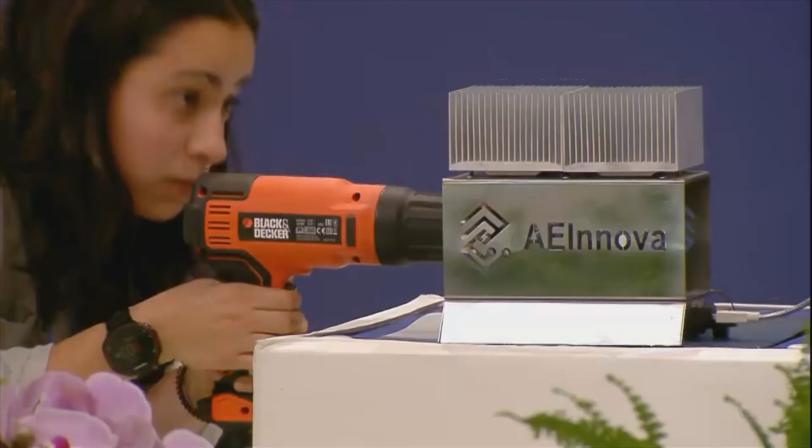Well, heat is energy. Let me show you a demonstration. So please, Teresa, let's show you how we convert the heat of a process. This is more or less a hair dryer, okay? And we will apply heat to this thermoelectric device. I will explain later the technology base of thermoelectricity, but just by applying a heat source to this solution, we can generate enough energy to move this fan, okay?

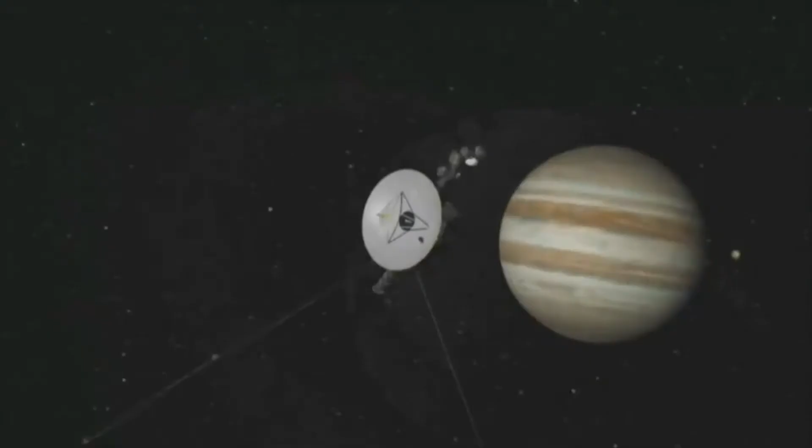Voyager spacecraft. NASA Jet Propulsion Laboratory, in 1977, planned to power a new era of deep space spacecraft. They tried to explore deep planets far beyond Mars in order to analyze what was happening at Saturn, Jupiter, and Neptune.

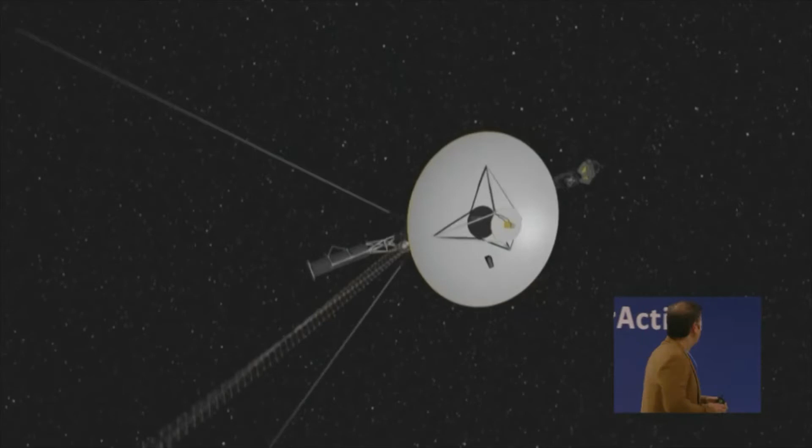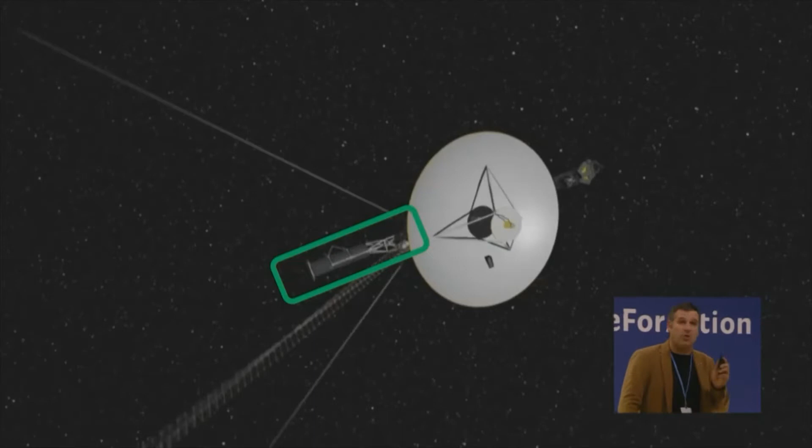So the only way to power a big spacecraft like Voyager was not using solar panels, because when you're far away from Mars, the sun is just a dot in the sky, so you cannot harvest any kind of energy from the sun. The only way is to use, in this case, a thermoelectric generator. This unit generates energy from a heat source. In this example, it was basically a plutonium heat source of 1000 degrees Celsius against the 0 Kelvin of the outer sky.

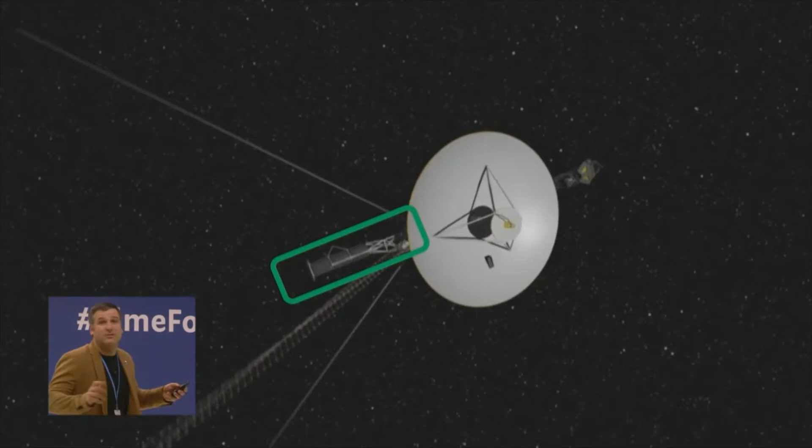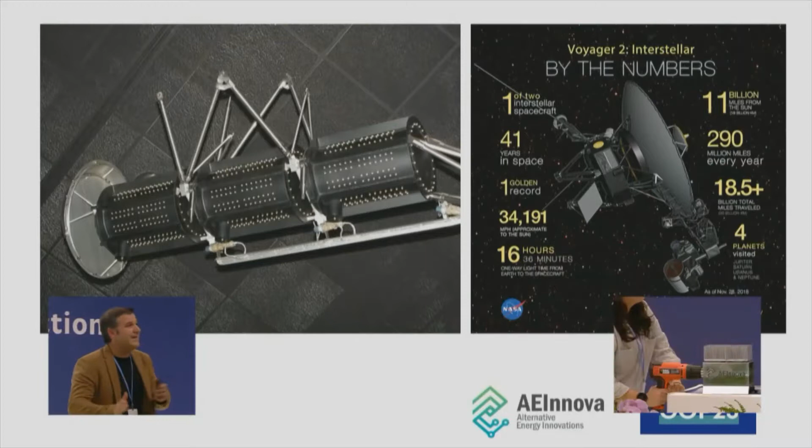Well, we are not using plutonium, absolutely. We are using the heat of an industry. But this equipment that you can see here, this is the thermoelectric generator. You will see later several similarities with our waste heat converter.

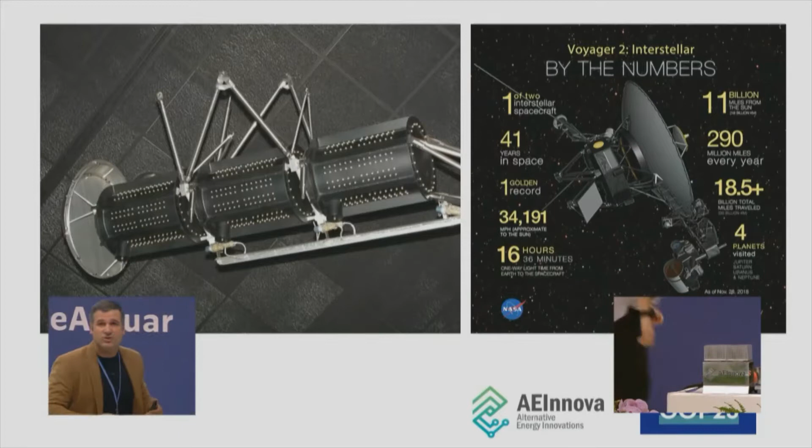From 1977 to now, there have been 63 deep space missions launched. The last one was sent by NASA, called New Horizons, giving us beautiful pictures of Pluto and the smallest planet of our solar system, the Ultima Thule. So, 63 space missions, and we said, why not use the same principle that works in the sky, but for the industry?

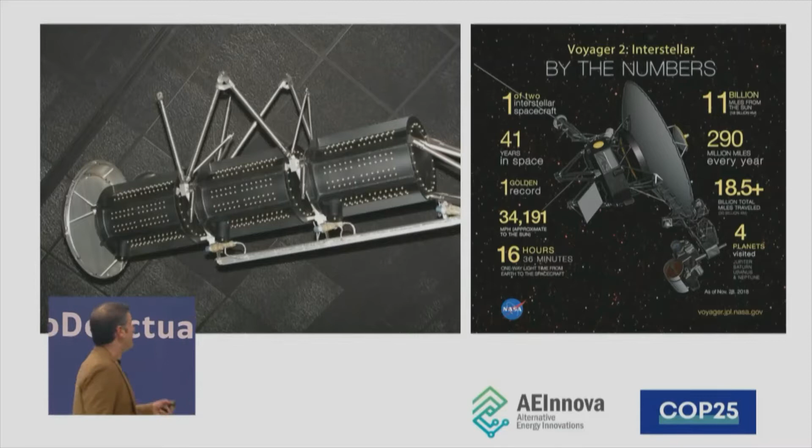But the question is, why haven't we heard before of these solutions here in the industry? Well, we can see here our planet, the Earth.

Later the deserts appeared, also not suitable for life. But then life as we know it nowadays appeared, and people took care of themselves, living in caves, dominating heat, making tools for surviving, inventing the wheel, for example, and being artists.

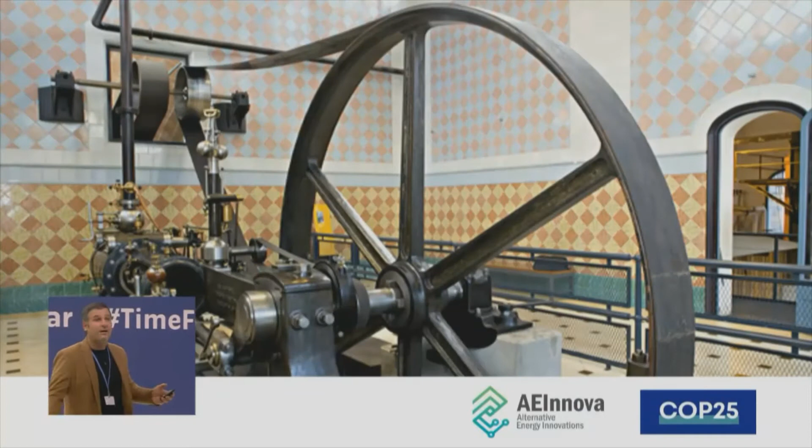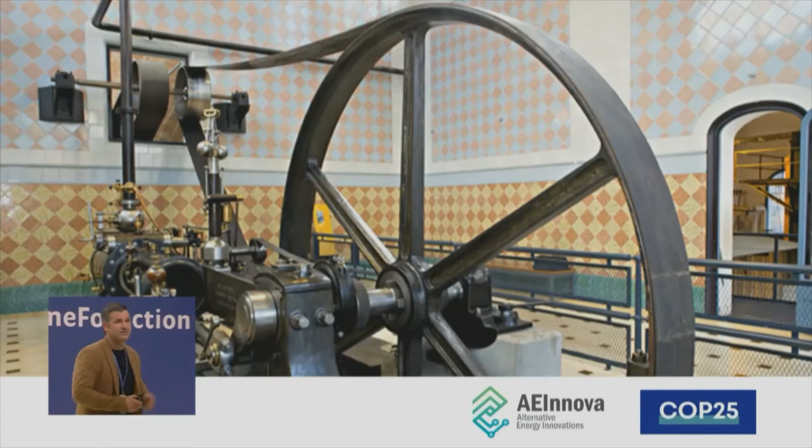Also, we began farming, and we began, how do you say that, David, stock breeding, okay? We organized ourselves, living in communities, until the Industrial Revolution appeared. This was more or less 150 years ago. So, more or less thousands of years living in the same conditions until industrialization appeared, giving humans the opportunity to enter the industry. We could manufacture anything - everything became possible to be created by our hands, thanks to steam.

Also appeared the massive production of cars. Anybody can take at his home a beautiful car to move. So it seems that everything was possible. We can be very creative in the way to consume goods and services, and the richness appears everywhere. So everything seems to be possible.

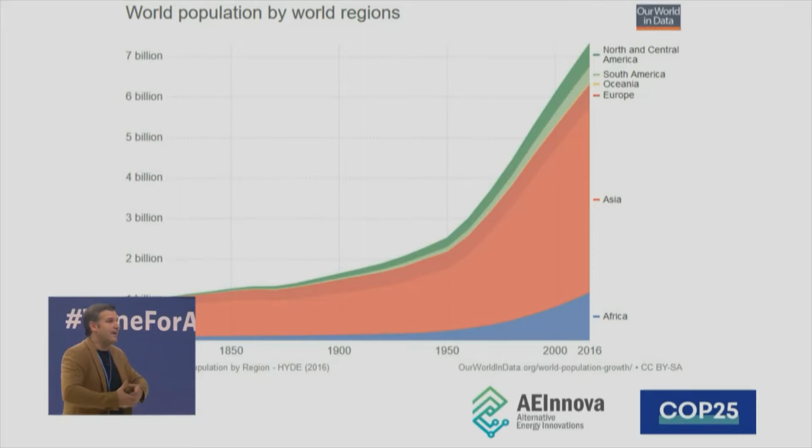But in the last 70 years, the global population has multiplied by 3. So there are not the same opportunities to access these goods and services for all the population. For example, if you pay attention to Asia or to Africa, the level of increase in population has been explosive in the last 30, 40 years.

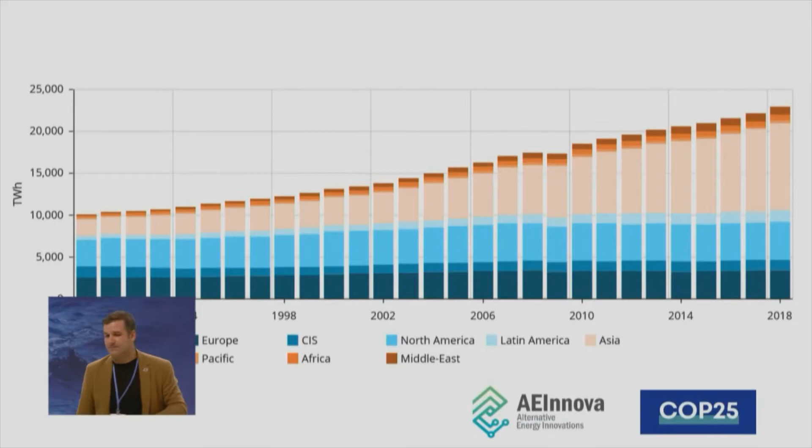So why haven't we heard before about this way to generate power? Well, this is what is happening now. To manufacture all the things you buy every day on Amazon, somebody has to produce them. We need a big amount of energy to create everything, to transform raw materials into final processed products. If you pay attention to the global energy needs worldwide, there is a big increase in energy demand just to give solution to this high demand for products from this new population that is appearing.

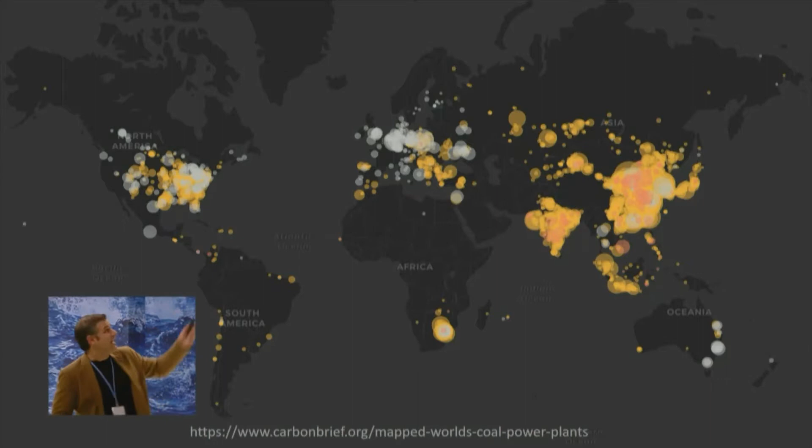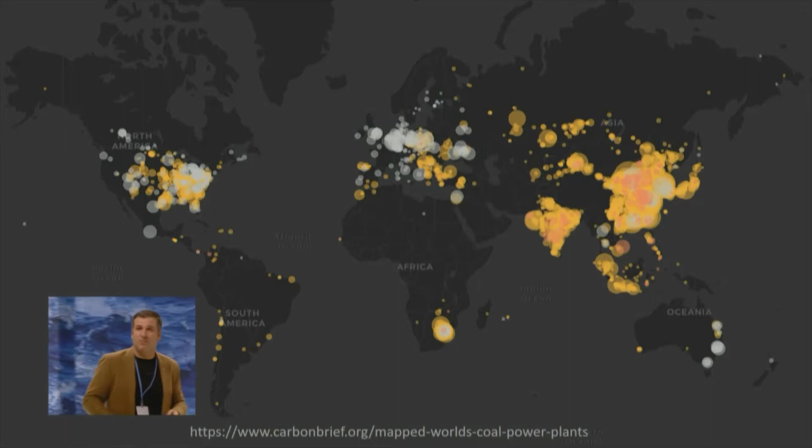In this map, you can see all the coal power plants that are active this year. You see, for example, in US and Europe, in dark gray and gray, these are the power plants that are going to be closed this year. So you will see in the next slide how Europe is decarbonizing, basically Poland, Germany, also Spain, and also US. But please pay attention to India and to China.

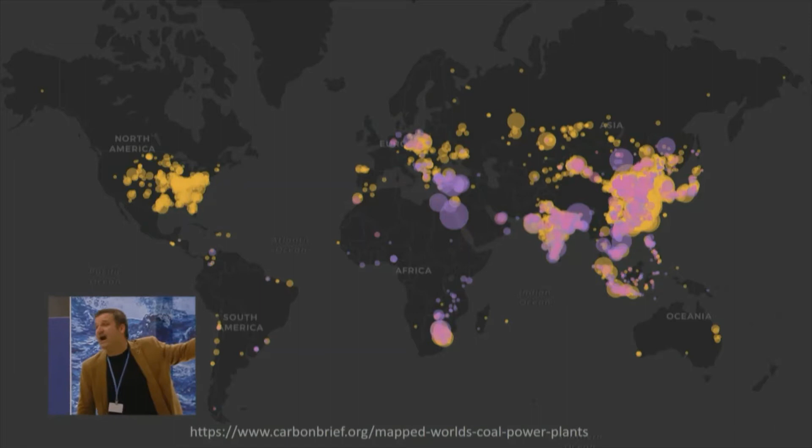Look, this is 2018, this is 2020. In purple are the new power plants that are now being manufactured to give the energy that these countries need to have the same conditions of living as European or American citizens. So they need this opportunity like us.

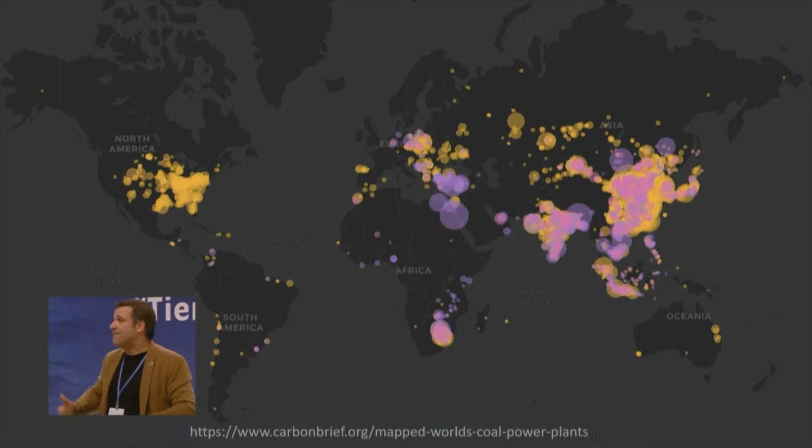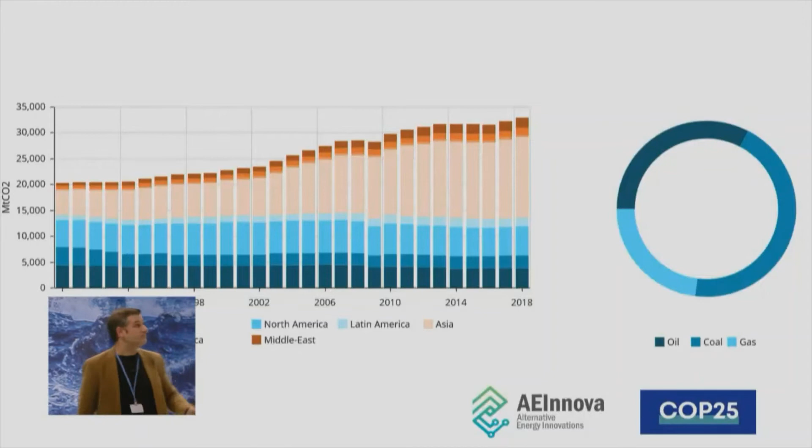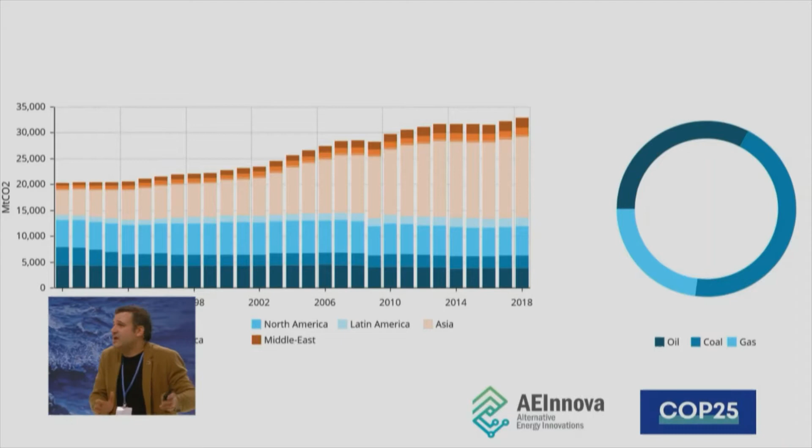But what is the cost to our planet? It's creating, manufacturing more and more power plants. This has a direct impact on carbon emissions. So more energy needs, using fossil fuels, easily translates into carbon emissions. This data is not decreasing.

So GHG emissions, plastic emissions in rivers and the sea. And why not your individual contribution? The ice melting of the Arctic is 30 square meters per year per person. And this data is even more in the US and Australia, that is 50 square meters of Arctic ice melted yearly. That means that in the last 50 years, we have lost more or less 40% of the Arctic ice, and this has direct consequences on sea level rise.

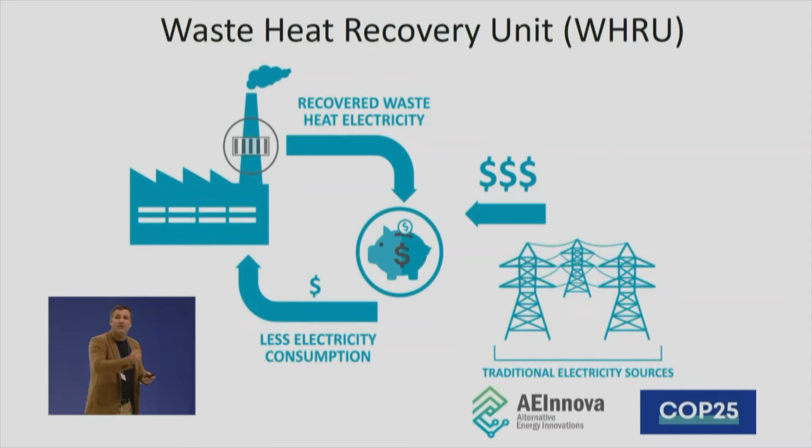In this example, in 2016, this equipment was installed in a Volkswagen plant in Spain. We cut this chimney in the painting room, and we installed a ring of 12 waste heat recovery units. We generate 30 watts per every module, so more or less 350 watts of power generation. Until this moment, the heat was just evaporated into the sky.

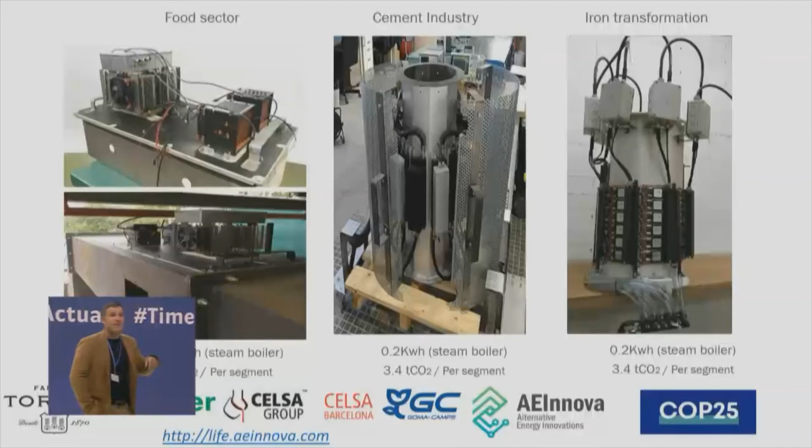This project now is co-financed by the European Commission LIFE program, LIFE 16 Environmental ES 344. So the European Commission is investing in energy harvesting because they consider this a big opportunity to become more energy efficient. We are making several projects in this LIFE program where we're installing waste heat recovery.

For example, in the food sector, this pilot has been installed in Bodegas Miguel Torres, a winery, one of the biggest and most sensitive to climate change wineries in the world. In this case, we're generating 150 watts in this demonstrator.

In the middle and on the right, there will be installed in 2020 five more pilots: in a distillery, a big chemical plant in Spain; in Celsa Group, the second biggest stakeholder in iron and steel foundation, to harvest heat from the casting machines; and in Goma Camps, one of the most popular Spanish paper manufacturers, where we're going to harvest heat from the smokestack.

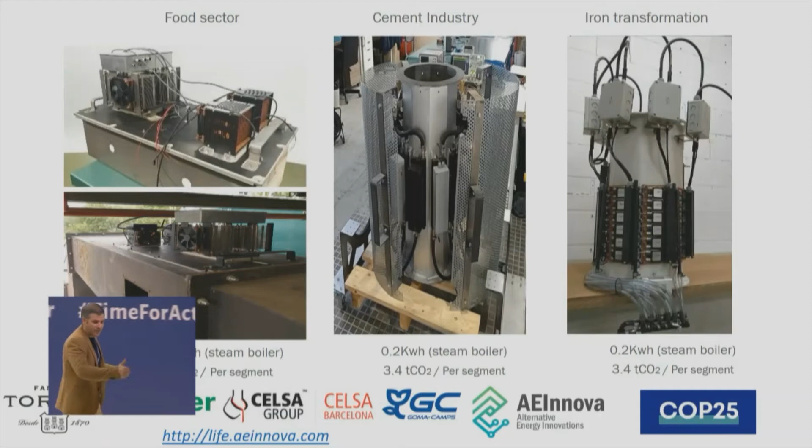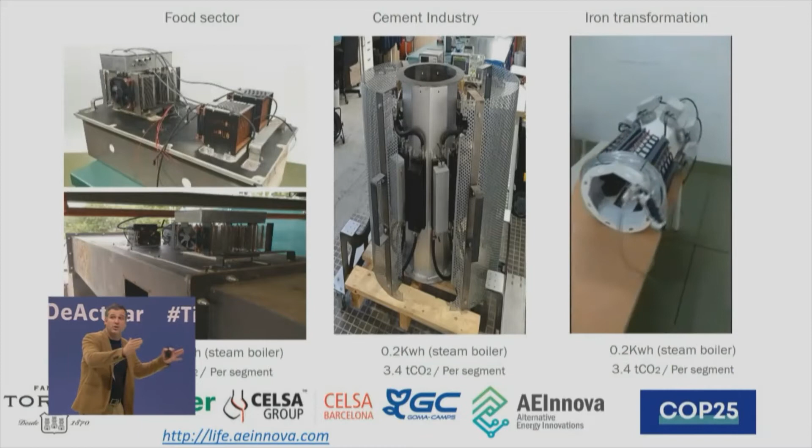So Miguel Torres, distillery, Celsa - how they work. Look, on the right, you see the equipment. You substitute a segment of a chimney with this equipment, and you generate 200 watts of power from the heat of the process.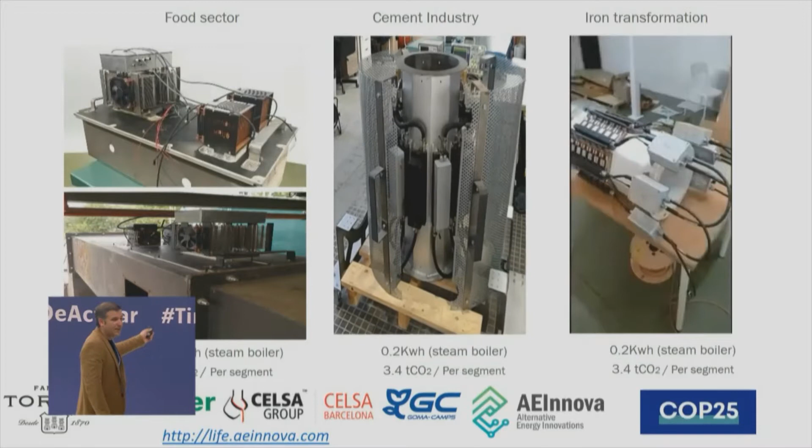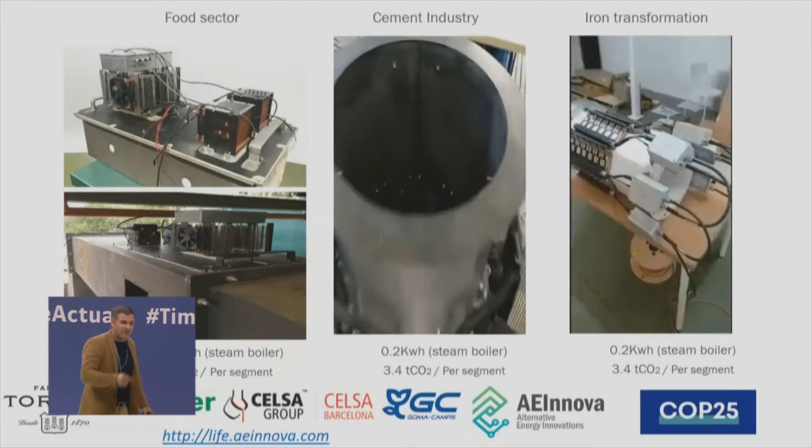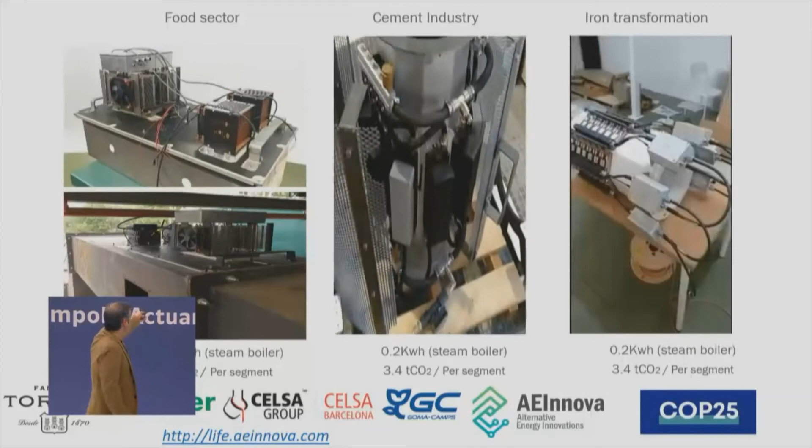The same in the middle. Maybe you remember when I was speaking about the Voyager spacecraft, the thermoelectric generator? It seems to be the same, so it's the same approach. In the middle, we have the heat source where we are harvesting heat, and thanks to an international patent called Alternative Energy Innovations, we can generate power from this, and we can reduce up to 3.4 tons of carbon emissions yearly.

So then, what is the approach to power a new generation of industrial IoT devices? From my point of view, this is a very important contribution to Industry 4.0. Let me pass to my colleague, David Comellas, who will explain.

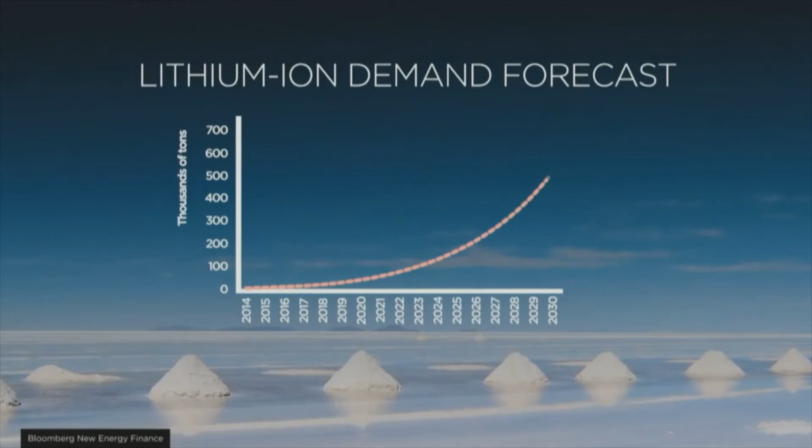That's because Bolivia's Salar de Uyuni contains millions of tons of lithium reserves. The demand for this resource has skyrocketed over the last few decades after it was discovered to be an efficient way to build batteries. Compared to other materials, lithium can store lots of power in a tiny space, making it ideal for cell phones, laptops, and electric or hybrid cars.

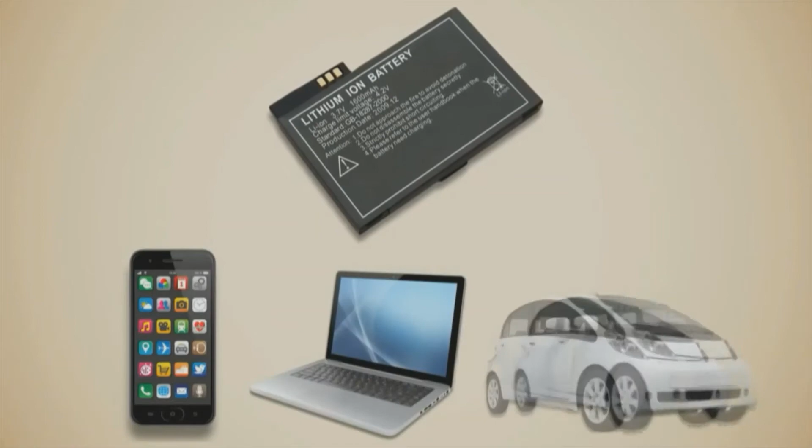This would seemingly be a boon for Bolivia, a country that is both South America's poorest in per capita wealth, but richest in lithium. Bolivia is by far the largest part of the so-called lithium triangle, a collection of salt flats that also stretches over neighboring Chile and Argentina.

These two countries have seen huge financial benefits from lithium extraction. In the summer of 2016, one Argentina-based contractor sold the resource for $20,000 a ton, double its usual price. These companies have also brought jobs to local indigenous communities. At the same Argentinian firm, more than half of the employees are indigenous people.

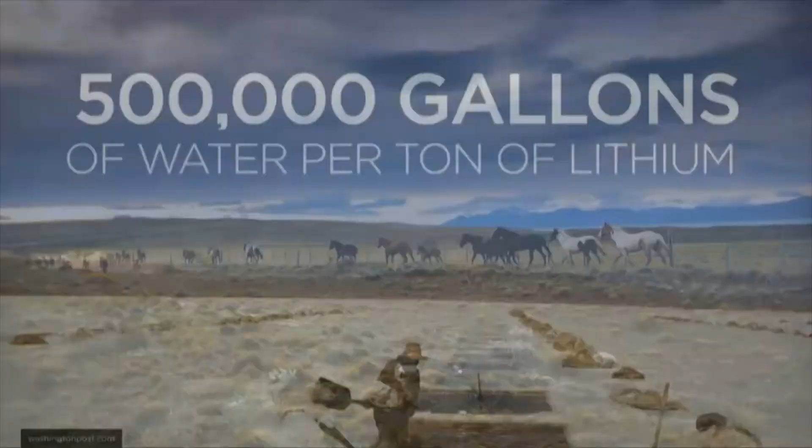But big business comes with major drawbacks. Mining sites pollute the air and contribute to global warming, and extracting the resource requires as much as 500,000 gallons of water per ton of lithium. In Chile and Argentina, water shortages already exist in many mining areas, and local communities worry that extraction will eventually run the region completely dry.

Beyond pollution and drought, no one is certain what the long-term effects of lithium mining will be. Many indigenous people fear that when the salt flats eventually run out of lithium, local communities will be left with nothing: no jobs, no water, no resource-rich land.

Okay, but lithium isn't the only material in lithium batteries. You can find other materials there, like for example cobalt. And why is cobalt also a problem? You can see that here.

The kitchen in somebody's house is now the entrance to a tunnel that goes deep underground. These men have to be careful as they descend, holding onto small ledges on the sides. What they're after is one of the rarest metals found on Earth: cobalt.

The Democratic Republic of the Congo is the source of more than half the world's supply. Much of it comes from hand-dug, artisanal mines like this one, some up to 60 meters deep. Cobalt is used in the production of lithium-ion batteries, the sort that power your electrical devices like smartphones and laptops, and also the batteries in electric cars.

But these miners, who are too poor to own laptops or smartphones, risk their lives for those who want them. Over the past year, there have been at least 80 fatalities in these mines. But we also spoke to people who said that many accidents aren't reported, and bodies are just left buried underground.

They don't have any basic tools, safety equipment, or protective clothing, nor do they wear face masks to save them from a near-invisible poison. Inhaling cobalt dust can be extremely dangerous, and it can cause a fatal lung disease called hard metal lung disease. It involves long hours and back-breaking labour for little reward, and for many, it's the only employment around.

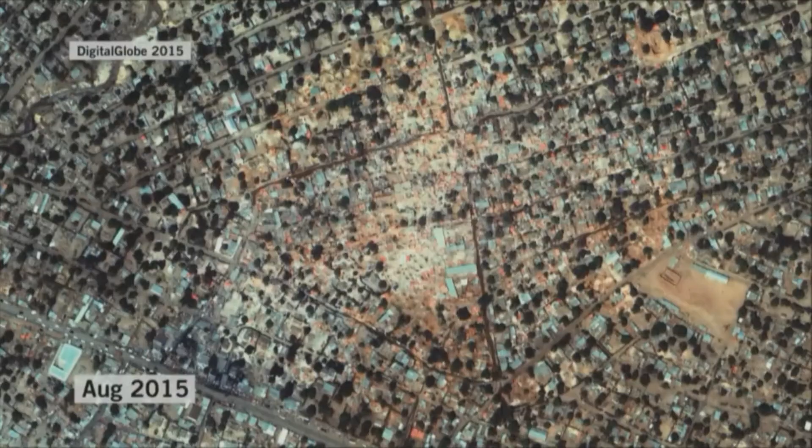Residents discovered cobalt here in 2014 and have since hand-dug hundreds of holes in the ground. These mines are extremely dangerous because these miners aren't getting any support from the government. They don't have technical training, and there aren't supports within these mines.

This region has the potential to be one of the world's richest mining areas. There are dozens of large industrial copper and cobalt mines, but most people live in poverty and scrabble around for a living. It isn't only adults who dig for cobalt.

Children too dig for cobalt, earning as little as $2 a day, and they are ripe for exploitation. The United Nations, which is based in the DRC, says that there are at least 40,000 children working in these artisanal mines in the southern part of the country. How many are working on cobalt as opposed to other minerals, we don't know, but it's clearly a very large problem.

So, why not offer the industry a solution to avoid the waste of 25 million lithium batteries daily? We have a proposal for the industry. It's called InduEye, the Industrial Eye.

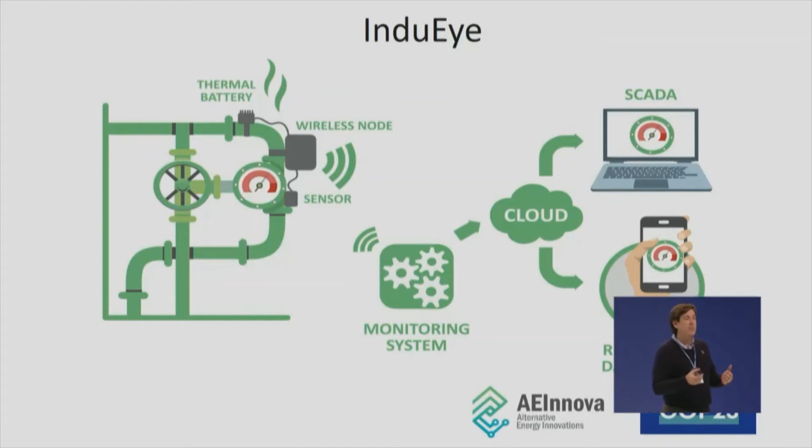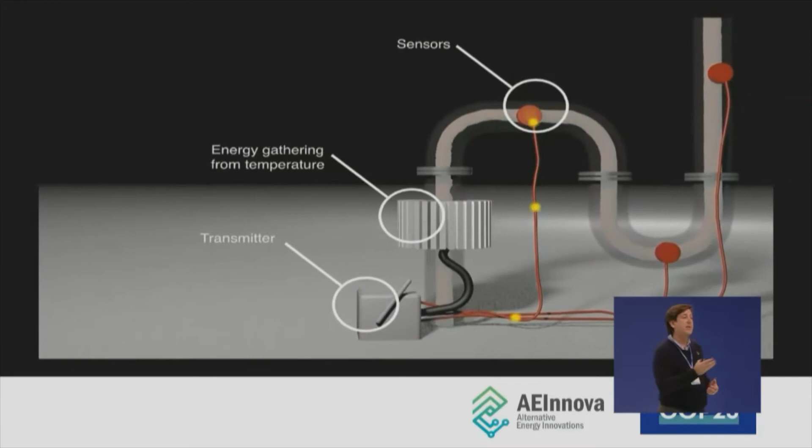It's the first battery-less IoT system in the market, powered by the waste heat present in the process. The principle is easy: we gather the temperature from the process, we place the sensors, we process the data, and we send it to the cloud to give the industry the data, wireless and without batteries.

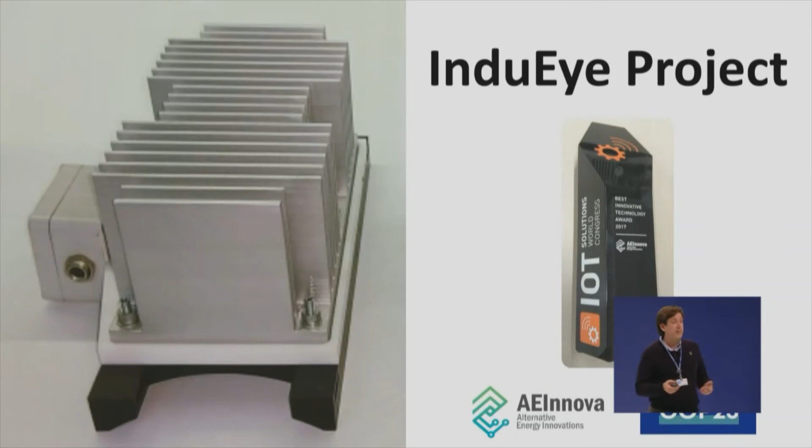This system is tested and very awarded, with more than 10 international and national awards. It's tested in big industry - this is an example in a big oil refinery in the south of Spain. We are monitoring the vibrations in a big gas compressor, and we are using the heat generated by the compressor to power the system. That means we can power the system 24 hours, 7 days a week without using electricity from outside, without using batteries.

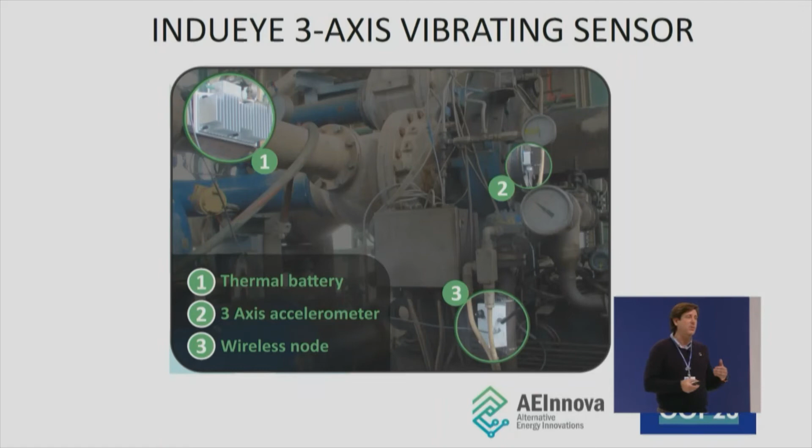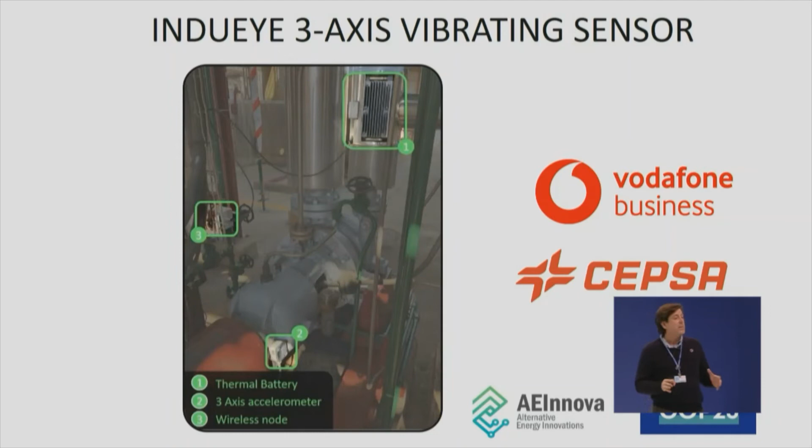We have also other pilots tested. This is in another oil refinery south of Spain from Cepsa, in hand of Vodafone. It's more or less the same principle, but in this case we send the data using 5G infrastructure.

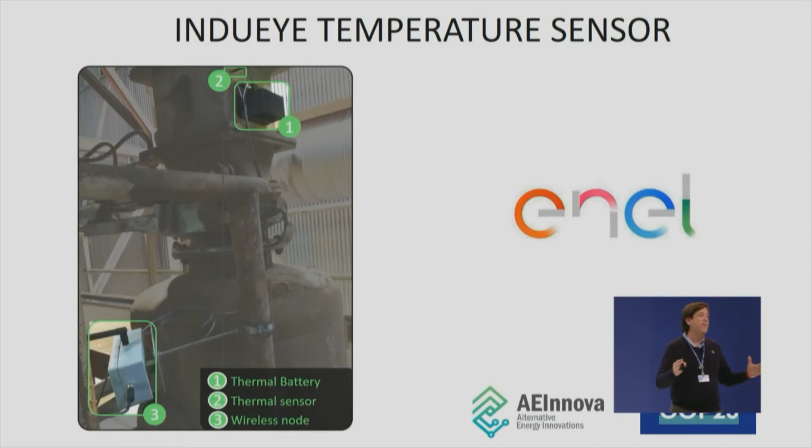We have also more pilots to test it. This is in a power plant, a coal power plant, using the heat generated in the electrostatic filters where the ashes are filtered. So the system is tested very close to market.

This is another case to detect steam leaks. Steam leaks are a big issue in the industry. It costs a lot of money, and this has also a big impact on CO2 emissions.

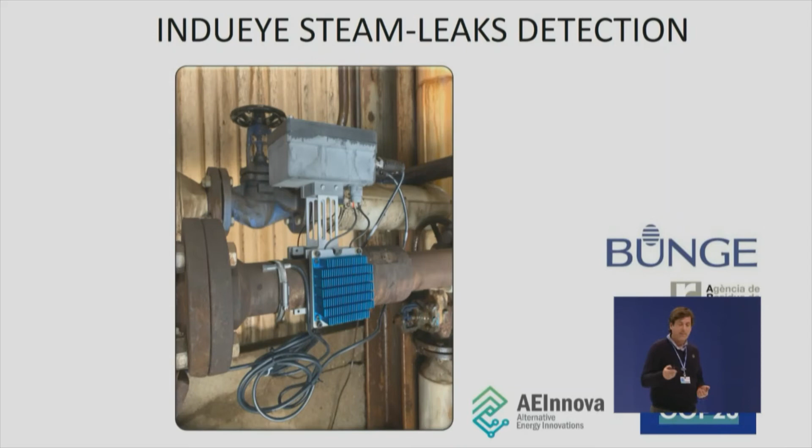And the future of the IoT and self-powered IoT systems is here. AEInnova is participating in a big consortium of European universities to develop the next generation of IoT devices at 1 cubic centimeter in size. The actual size of the device - you can see it's heavy, it's 17 centimeters long. The next generation is 1 cubic centimeter, and it's enough to power the IoT device, to send data and to process it.